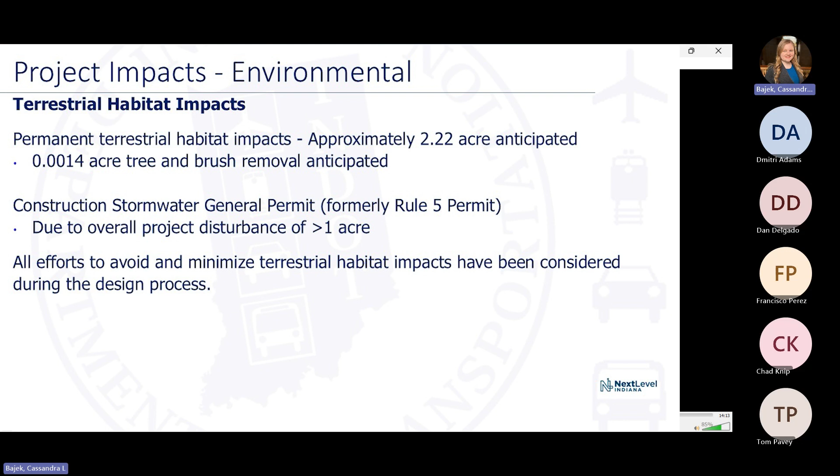Now, I'll pass the presentation back to Dimitri to discuss right-of-way acquisition, alternatives considered, and the project schedule.

Thank you, Josh. My name is Dimitri Adams. I work for Lawson Fisher Associates, the consulting firm hired by the state to perform design services on this project. I am the project manager, and I will describe the real estate process and the overall design.

The project does involve a proposal to acquire right-of-way. The preferred alternative is a larger footprint than the existing condition, so some property acquisition is proposed. What you see here is the cover of Federal Highway Administration real estate acquisition document. This document describes the real estate process, and a copy is available here today if anybody desires to read it.

The real estate acquisition process was developed in accordance with the Uniform Act of 1970 and requires an offer for just compensation. The typical process involves two activities: appraising and negotiation for buying. For this preferred alternative, the proposed land amounts are 2.02 acres of permanent right-of-way and 0.119 acres of temporary right-of-way across 10 parcels. Permanent right-of-way involves the state purchasing and taking ownership of the land. Temporary right-of-way involves the state paying a fee to use the land for the purpose of construction, but ownership remains with the landowner during and after construction.

And now, I will speak with the overall design. It was recognized the intersection on State Road 2 at County Road 500 West was no longer operating well, as traffic volume has increased over the years. The first step is to work through various alternatives to determine the best course of action.

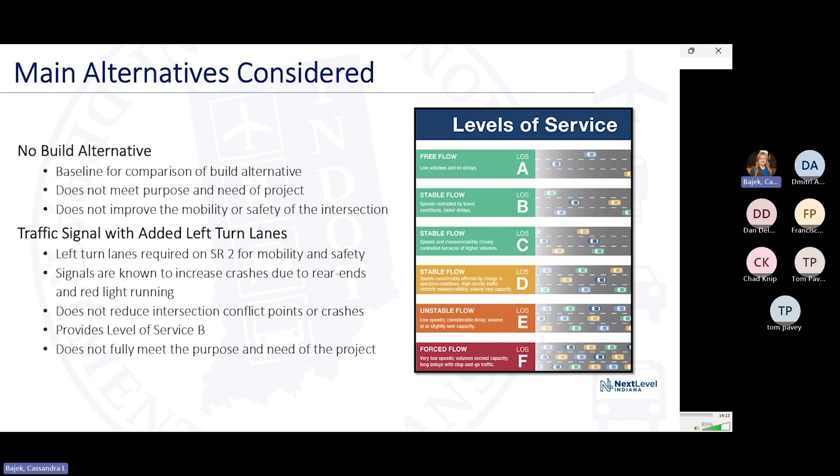A traffic signal with added left and right turn lanes on State Road 2 is likely what would have been constructed. Part of the signal evaluation involves a review of multiple technical warrants. While this location passed the warrants, further analysis was performed related to safety. Traffic signals are known to increase crashes due to rear ends and red light running. Signals do not reduce conflict points. The traffic capacity analysis for this location indicated a proposed level of service B. The letter designation is similar to what you're familiar with from school. Simply put, A is good, F is bad. The better the grade, the less congested the roadway.

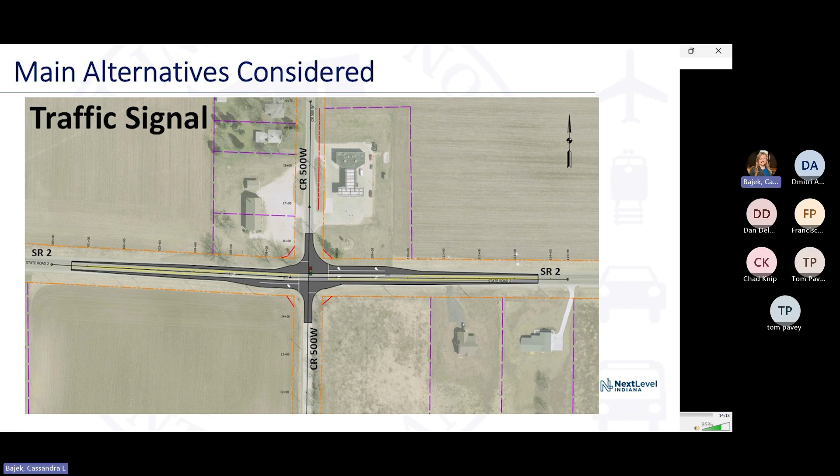This is an aerial display with traffic signal. North is up. State Road 2 runs across the graphic from left to right. The graphic shows potential left and right turn lanes on State Road 2. After a more comprehensive analysis, it was determined this alternative does not fully meet the purpose and need of the project. The second alternative to discuss is the roundabout.

This is a current preferred alternative. Roundabouts reduce conflict points by 75% compared to a typical four-way intersection. The geometry induces reduced speeds, helps to calm traffic, and reduces congestion. At this location, the traffic analysis indicated a level of service A, the best possible level of service.

This type of alternative, though, does have a higher construction cost. It has more environmental impacts due to a larger construction limit footprint. While the cost is an important factor to analyze, so too is the benefit. According to INDOT's website, roundabouts reduce fatalities by as much as 90%.

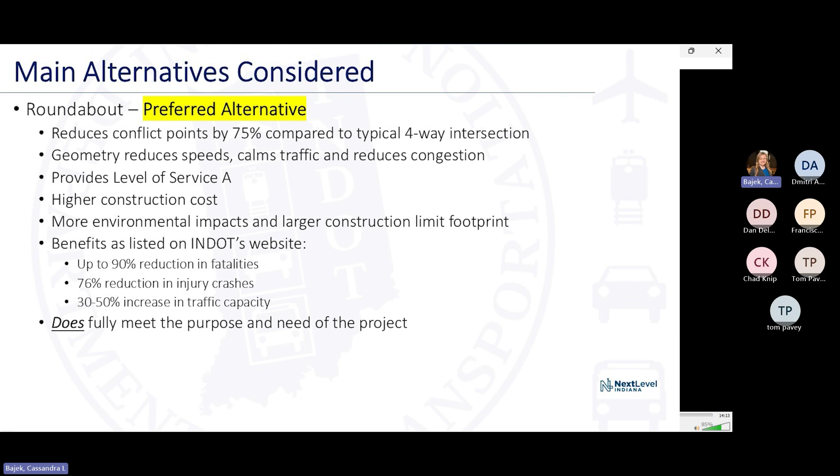Injury crashes are reduced by 76%, and traffic capacity increases by 30 to 50%. The project is a safety project. In that regard, this alternative does meet the purpose and need of the project.

We will now step through some of the graphics of the roundabout. There are graphics physically printed and on display as part of the public hearing. North is straight up on this one. State Road 2 is running from left to right, west to east. This is a faded aerial of the project intersection with a proposed roundabout overlaid with black lines.

The roundabout is not centered on the existing center of the intersection. It has been shifted away from the commercial properties on the north side. Right-of-way acquisition will be needed on this project, but no homes or buildings will be acquired.

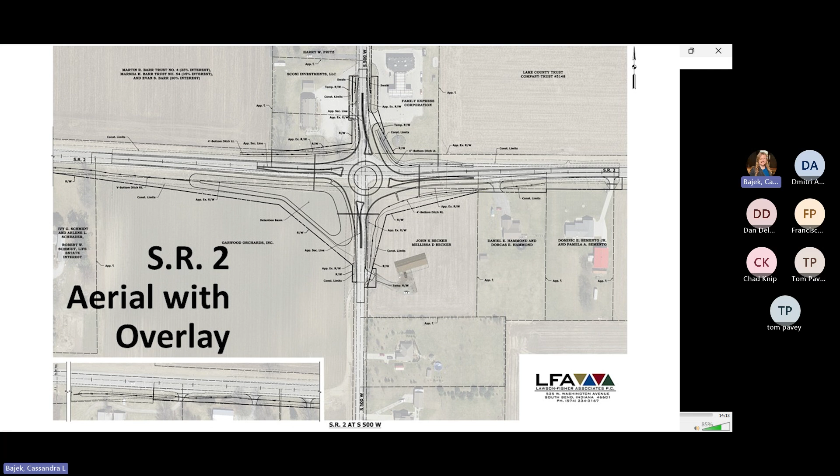There is a detention basin in the southwest quadrant. A basin is needed to handle the storm runoff from the large hard surface roundabout. The project includes ditches and enclosed storm sewer to effectively drain the area and funnel any rain events to the basin, which will be discharged to the downstream side of the existing 30-inch pipe located approximately 1,800 feet away from the intersection.

This is a graphic of the proposed roundabout in color. Again, this is printed and on display for a closer view after the presentation. The dark gray is the asphalt pavement. The orange represents raised concrete islands that will be colored concrete.

The darker pink again represents raised concrete, but this concrete is not as high and allows large semis to drive over it with their wheels through their large turn radius. The center of the roundabout is light green. This area will be mounded and have tall grasses. Visibility is intentionally blocked across the roundabout to induce drivers to turn right.

Dark green is the basin. Thin black lines with arrowheads outside of the solid concrete pavement represent proposed ditch center lines. The arrowheads around the roundabout lead to the basin. Residential homes and commercial buildings are in beige. Existing vegetation to remain is in solid circular green symbols. Existing vegetation to be removed is in solid circular red symbols.

The west and east legs of the roundabout are longer because they are countering higher speeds from the east and west compared to the speeds on County Road 500 West. You will also notice the curvature in the legs, and also where the legs meet the center. The curves are intentional to help reduce speeds, to control traffic direction, and to appropriately funnel vehicles into the roundabout while still providing lines of sight.

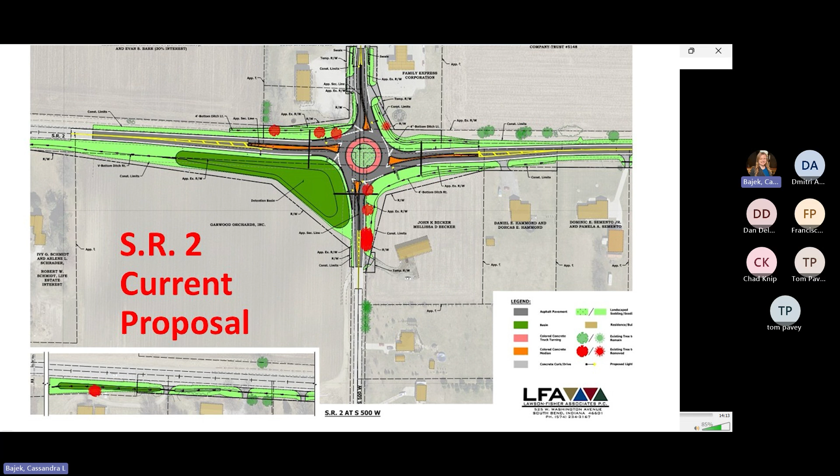There are 10 parcels with proposed right-of-way. 3 of the parcels involve permanent right-of-way, 3 parcels involve both permanent and temporary right-of-way, and 4 parcels require reacquisition of the existing right-of-way. Personnel will be available after the presentation to discuss any parcels affected by the preferred alternative.

I would also like to clarify on the streetlights. The poles are the black squares outside of the pavement. The yellow lights are cantilevered from the poles and extend out over the pavement. The proposed signs are also shown on the exhibits. All signs except for directional signs near the exit point of the roundabout will be installed outside of the paved shoulders to accommodate the combined turning movements.

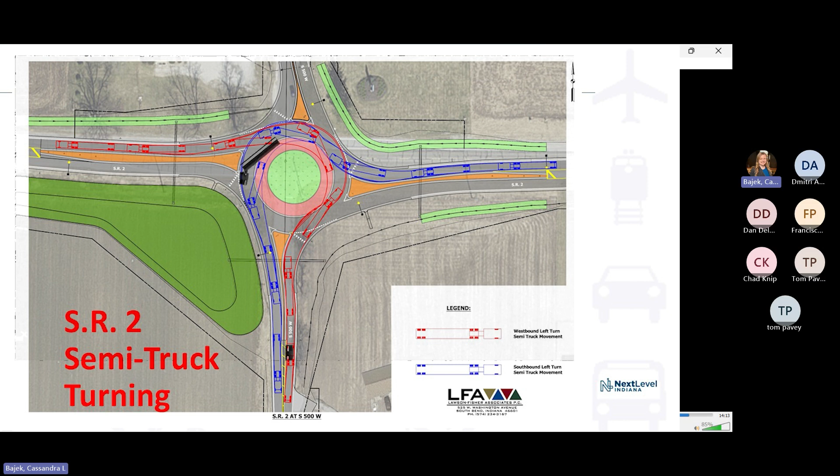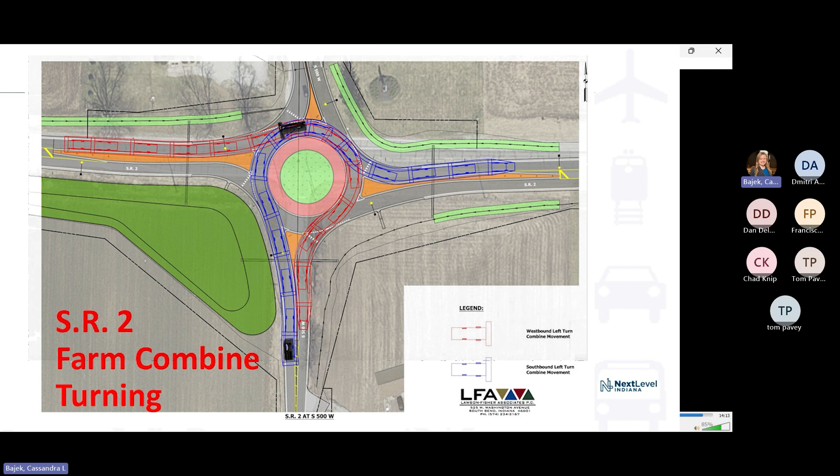This is another turn movement image. The depiction is for the farm combine making the same turning movements as the semi. The combine deviates from the main lanes less than the semi and should be able to easily navigate through the roundabout. We also have videos for each of the turn movements to show how the vehicles navigate through a roundabout. The semi will be first, followed by a farm combine.

We will now transition to the project schedule and comment period.